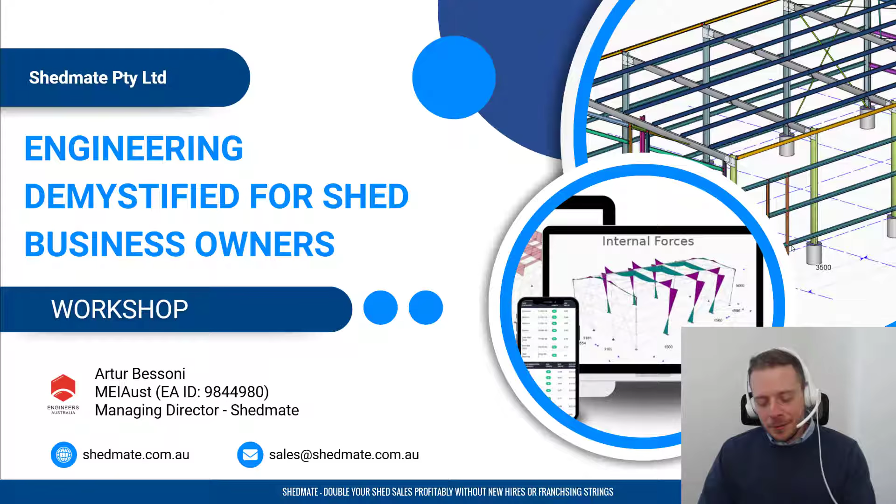And I was looking forward to this workshop. We're going to talk today about engineering demystified for shed business owners. We're going to discover why engineers and shed business owners sometimes hate each other and what's going on, why there's so much frustration with communication with engineers, they never get back and all of that. Why is that? So I want to explain some concepts to you in the face of that communication between these two parties. So if you run a shed business, you probably faced this before.

So why do engineers make everything so complicated? Why do their reports always look different? I just sent a report to them and it came different. Now I have these massive footings. What's going on? And why does it feel like they're slowing me down instead of helping me move faster? I've been talking to many shed businesses around Australia, and there is something that repeats all the time: delays in terms of engineering, inconsistent assumptions, extra costs, liability fears.

What's going on there? So, if you haven't been to other workshops, allow me to introduce myself very quickly. I am both a professional engineer and I own the shed business myself that was supplying cold formed steel. So I lived on both sides of this table, right? Having these discussions with other engineers who were signing on the projects that my business were in, and I've also been involved in structural design, in which we're developing structural design for other firms.

So my goal in this webinar is to translate to you this engineering world in simple terms that make sense for your shed business. And we're going to cover exactly why those assumptions matter, what are these assumptions, what engineers are really doing, and how you can align with them to save you time, money, and headaches. So if you understand better how the engineers work, how they operate, then you can improve your communication with them so your outcomes can be more aligned to your business needs.

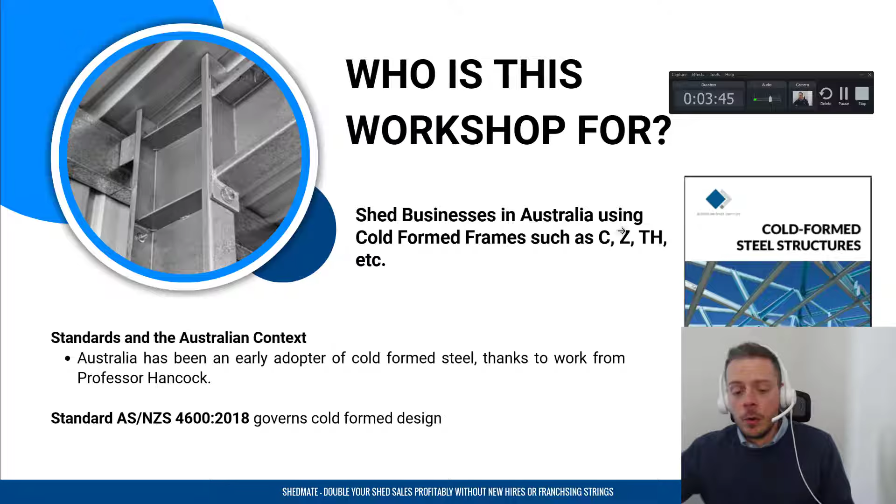So now let's go to assumptions, right? So every time an engineer makes a decision, if it's gonna have knee bracing or not, if it's gonna be pin or fixed connections, if it's gonna be site specific or generic, I'm gonna go through in detail each one of these assumptions and show images so you can understand better. But every time that we change these assumptions, the outcome will be different.

So if we have 5 engineers in a room and you give them the same project to design, they might have different assumptions and you might end up with 5 different projects. So how do you actually get the more competitive one, the one that works better for your company? This is what you're going to see here. So these different assumptions can lead to frustration because the shed owners see this as inconsistency.

It's like, oh, another engineer does this in a more aggressive way, so they think that's better. And the other one is very conservative, so they think that's not ideal. But both engineers can be totally right. And we're going to understand that process better in this workshop.

So by the end of this workshop, I hope you leave here understanding it better, so when you're talking to engineers, you know what to talk to them about, so they provide what you need. Okay. So which option is more conservative? Which one is more aggressive? Let's do a very nice experiment here.

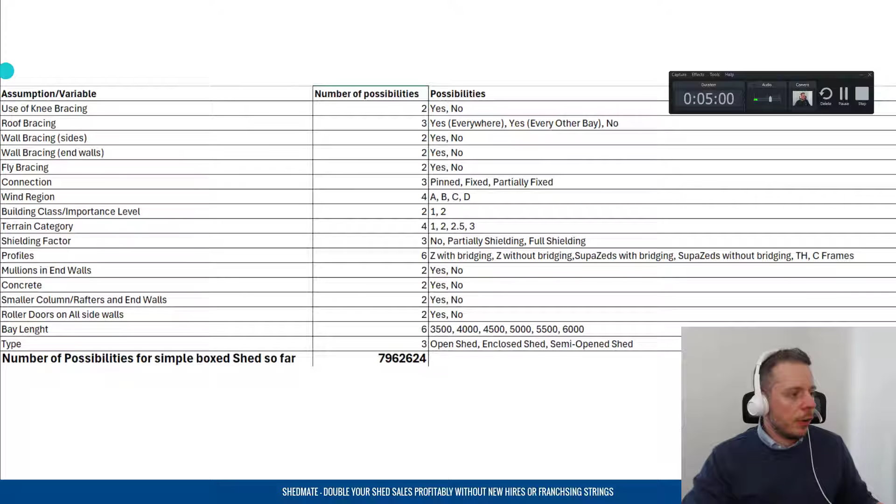So let me just move you to an Excel spreadsheet to show you some of these assumptions or project variables. So imagine you're designing a specific shed, right? It's the same shed, and you send it to engineers, and you say, look, I want you to tell me what's the more conservative frame for this shed. There are lots of assumptions and variables that we can go through.

One example of this is, hey, are we going to use knee bracing or not? Are we going to brace the roof? Do I want to brace the whole roof? Do I want to brace every other bay? Or, hey, I don't want bracing, it's too hard. Do you want to brace the walls on the sides? Do you want to brace the walls on the end? Do you want to use fly bracing? What connections do you use? Is that going to be pinned, fixed, partially fixed? We're going to jump into that later.

What's the wind region? It could be wind region A, B, or C. What's the building class? Is it a garage? It can be importance level 2. Is it like an isolated farm shed? It could be importance level 1, depending on some regulations. What's the TC, the terrain category? Is it going to be 1, so pretty much in front of the ocean? Or is it going to be 4, like in the middle of Adelaide, city center?

What's the shielding? What profiles are we using? Are we using just regular Zs? Are we using SupaZeds? Are we using top hats as purlins and girts? Are we using C-frames? Do you want to use mullions in the end walls? If it's a drive-through shed, then we don't need mullions. Are we doing concreting or not? The concrete can help on the resistance there and create more stable footings for you.

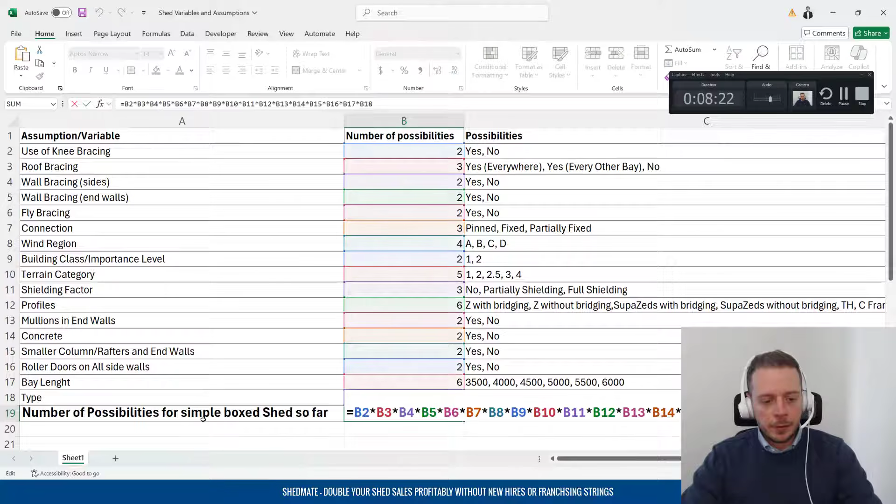And if we start multiplying, for example, hey, I have 2 options, use knee bracing or not. I have 3 options for roof bracing. I have 2 options, 2, 2, 3. So I'm just multiplying all of these here, just so we can see the number of possibilities. This is going to have to be 18. So the number of possibilities for a simple box shed so far would be 29,859,840, if I didn't multiply anything wrong. Yes, that's the amount of different possibilities we could get.

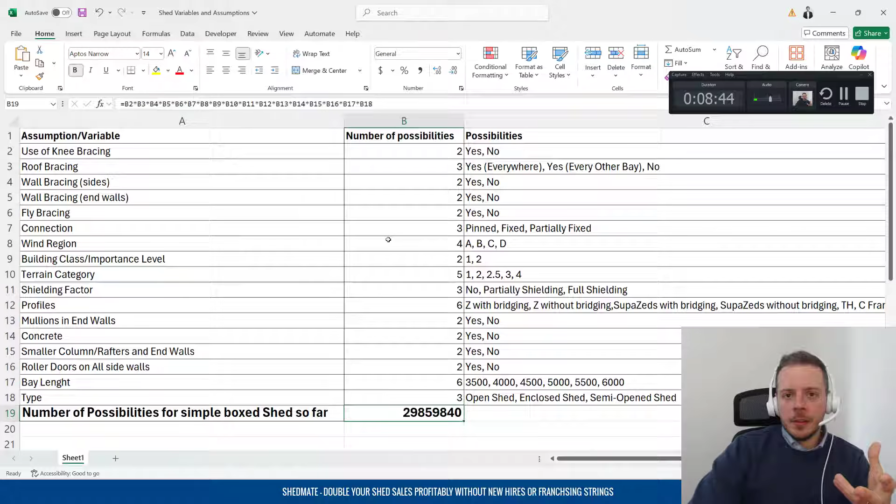But obviously, I'm using very general assumptions here. And depending on your shed business, we can diminish this a lot. So for example, let's say, hey, I'm not going to use knee bracing on my sheds. I want to brace every other bay. I want my sheds to use bracing on the first and last bays. I don't want to use wall bracing. Let's use fly bracing. My connections are going to be pinned, so let's say bracket connections.

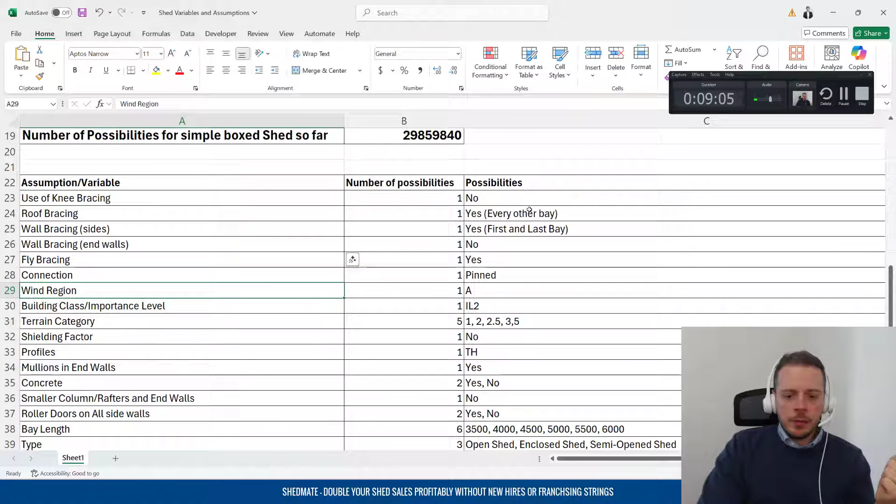It's going to calculate this for region A, importance level 2. Terrain category, that's going to depend, so I'll leave that for the specific site to provide me with the information. No shielding factor, profiles, please do with top hats, mullions in end walls, let's do it. Concrete, well, it depends on the project. Some might have, some might not.

So you can see that I'm starting to reduce the amount of variability, but still I have 360 possibilities for the same shed. And I'm not talking about changing sizes, height, width, length. I'm just talking about some specific variables and assumptions, decisions we could make when designing that shed. So can you see the amount of assumptions here.

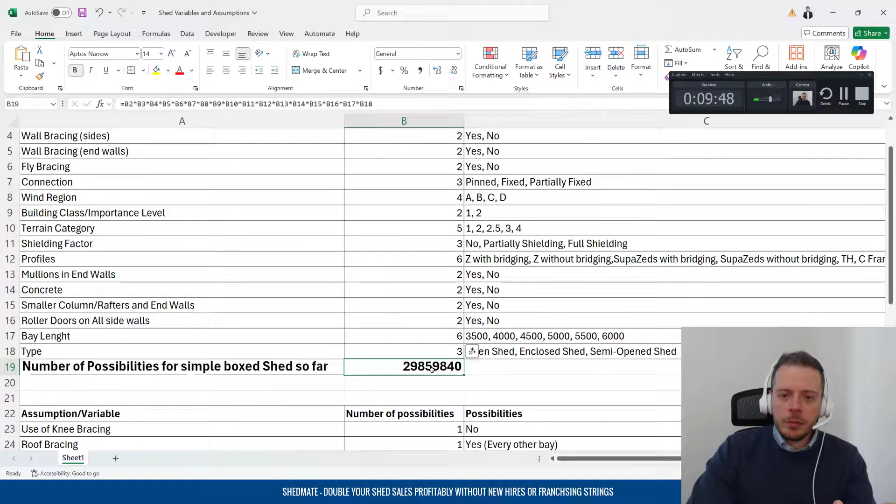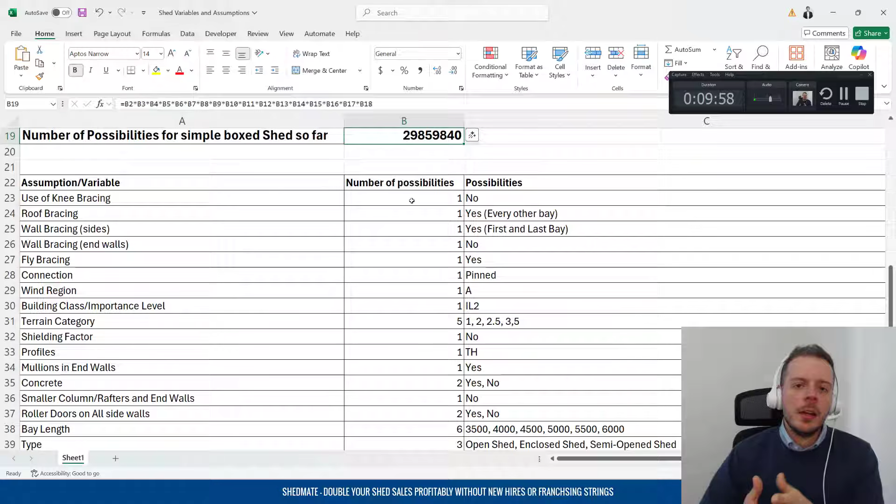So this is why sometimes an engineer will design something and they would add an assumption that doesn't necessarily match your business needs. So you need to be very specific with them about what you need. If you are an existing shed business and you are using a specific software out there, they will have some of those assumptions baked in. The advantage is it simplifies, so you get the outcome without a lot of back and forth. But the disadvantage is that everyone using that has pretty much the same outcome, so you don't have much variability.

So when you have a more custom shed or custom company that's doing welded connections, for example, then you need different solutions. And I guess this is where ShedMate helps a lot, because no matter what your assumptions and variables are, we could work with your assumptions for your business. So you have customers using top hats, customers using Z, customers using fixed connections, customers using pin connections, and the engineering design will change from company to company, which matches their specific needs.

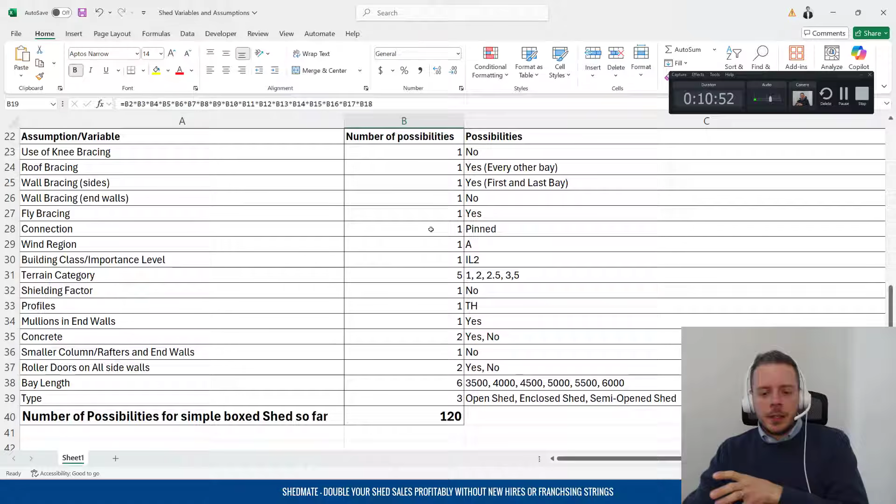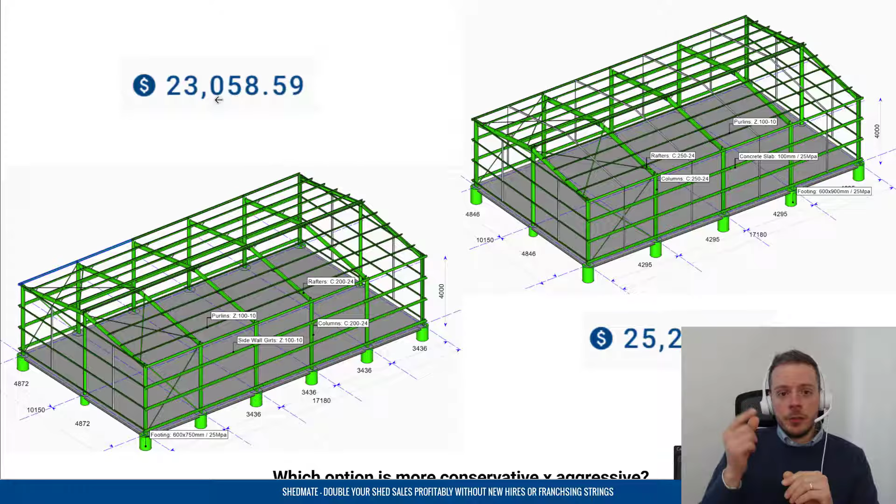Okay, so going back to our slides here, I have a very good example to show you. So this is exactly the same shed, but we're using different portals. This one here uses 5 portals, while the other one uses 4 portals. The one using 4 portals has a total price of $25,200, while the other one using 5 portals, using a C200-24, has a total price of $23,000. So we just changed one of those assumptions. Instead of using a 3.5 maximum portal length, we used a 4.5 maximum, which was in fact 4.3 meters long, more or less. And that's pretty much $2,200 of difference. It's exactly the same shed.

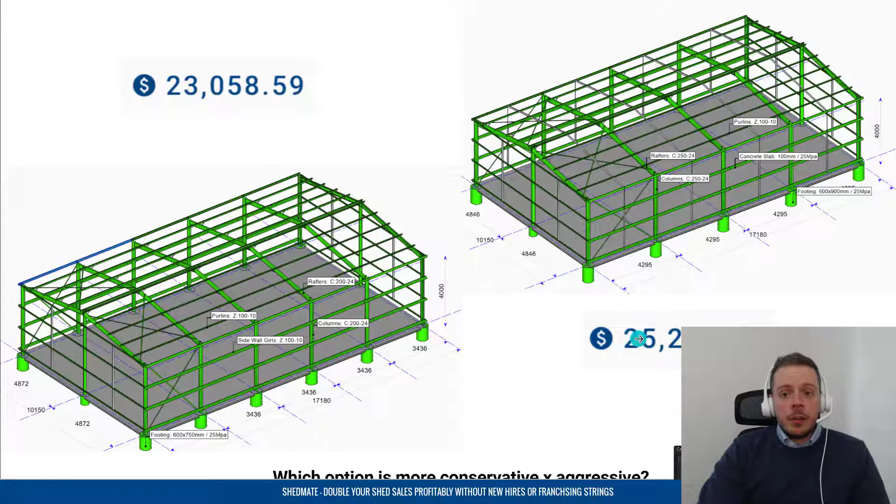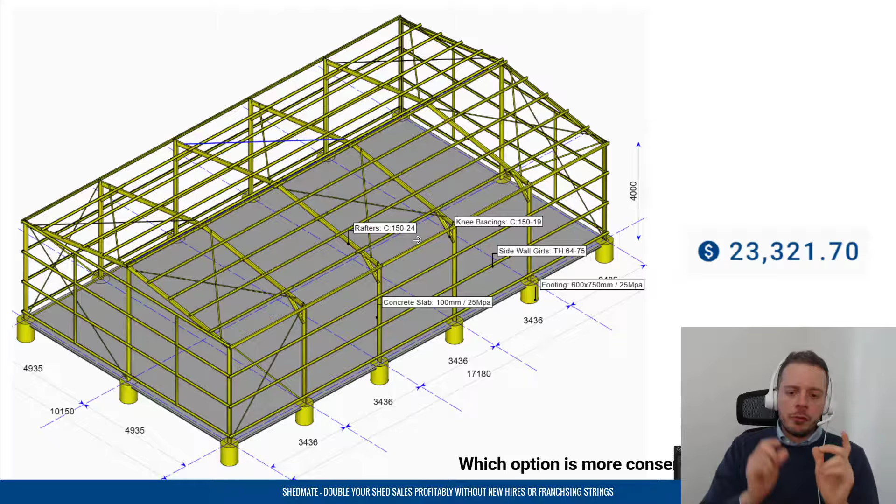So let's look at another option here. This one is using a C150-24 and 5 portals as well, and the price is $23,300. So if you compare, this one is using a C200-24, the other one is using a C150-24. So if you're just looking at those frames, you might have the wrong representation of the engineering outcome. You might say, oh, this one would be the best one because it has a C150 instead of a C200-24. But there are other items you need to consider when pricing.

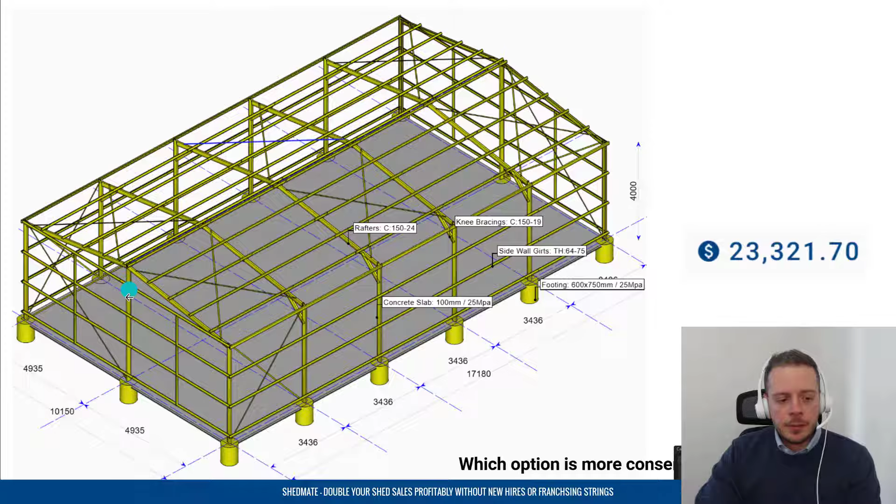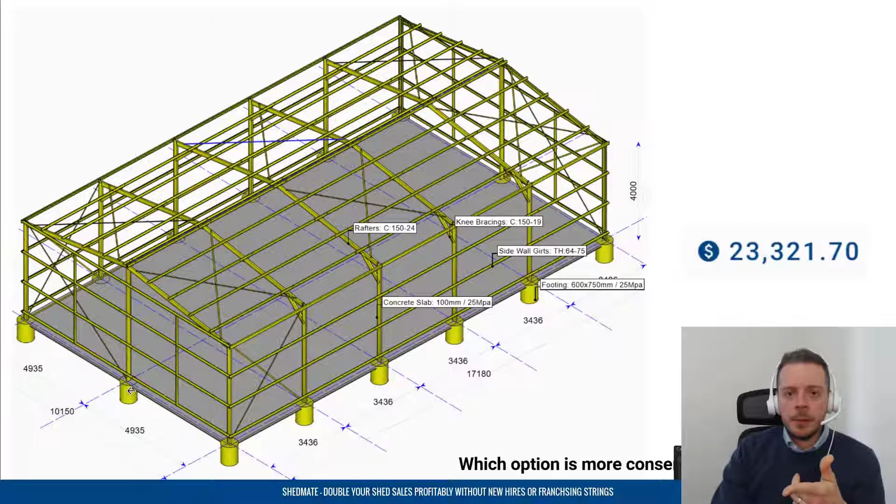So in this example here, we have some knee bracing. Because we have additional bracing on these walls, we need to increase the mullion sizing and probably the mullion footing, which is going to make a difference as well. So can you see that we have 3 different assumptions here, 3 different shed prices. The only way I could find that pricing is because ShedMate allows me to play with the numbers, and I can see how much the change I'm making is going to impact my shed. So this is a very good way to find very optimized solutions that match your business needs, not like a general system that gives you a fixed outcome.

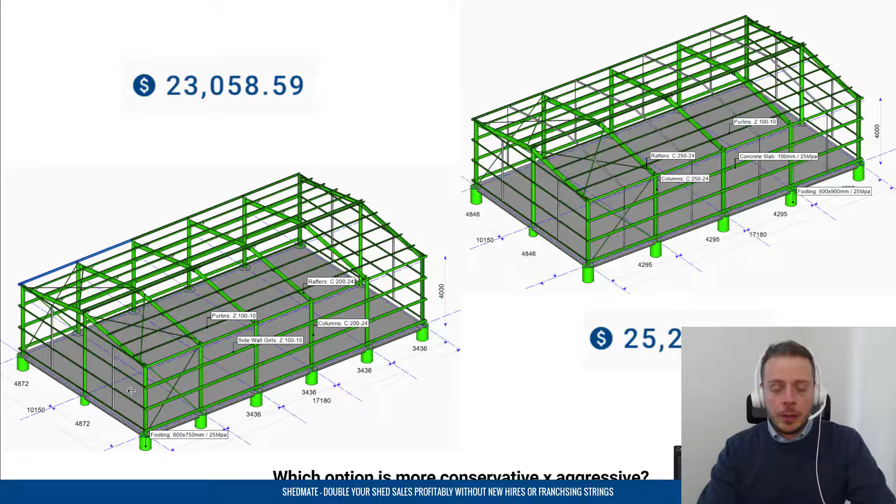All right. Now let's cover some principles that can give us some base so we can cover those assumptions in more detail. And one of them is about cold formed steel and buckling. Unlike hot rolled steel, I'm talking here about universal beams, universal columns, the structural steel or fabricated steel, as different people call it, cold formed is what we call thin walled.

So as you know, cold formed is very thin, so the failure isn't just about stress, but about geometry. I don't want to overcomplicate here, but just follow this with me, and I think it's going to make sense. So buckling is one of the things we need to assess when doing cold formed steel. And what's buckling? It's a deformation of a structural component, such as a column or plate, under a compressive force.

So here's a ruler I have, and it's very thin, as you can see. So if I apply a compression force, what's going to happen is this ruler is going to bend. Right? Can you see it's bending? So this is exactly the same thing that happens when we're doing the design of cold formed. It's very thin, so it bends. It doesn't need a lot of stress to bend.

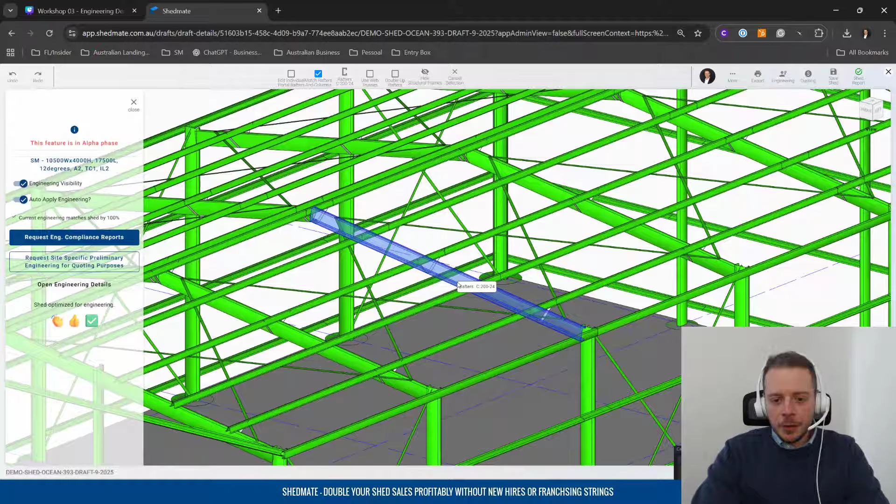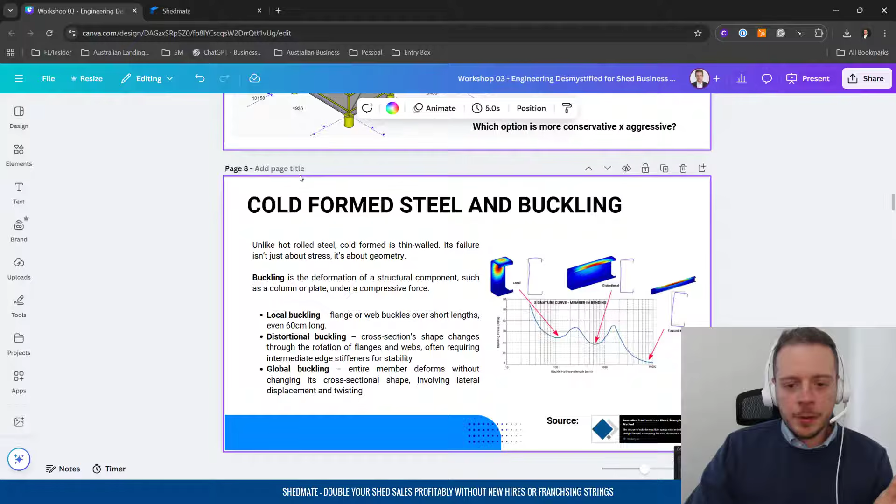So for example, local buckling could happen every 60 centimeters. So no matter the amount of fly bracing I put here, we could still have a local buckling because it's every 60 centimeters. And we don't want to do bracing every 600 millimeters. That's not practical whatsoever. So this is something that we assess when doing the analysis.

The other one is distortional buckling, which is the cross-section shape changes through the rotation of flanges and webs. And then we also have the global buckling. That's where the entire member deforms without changing its cross-sectional shape. Once again, I don't want you to be very worried about the complicated terminology here. I just want you to understand that buckling exists. Remember the ruler? Buckling exists, and this is what we assess very consciously when doing the design of these types of buildings.

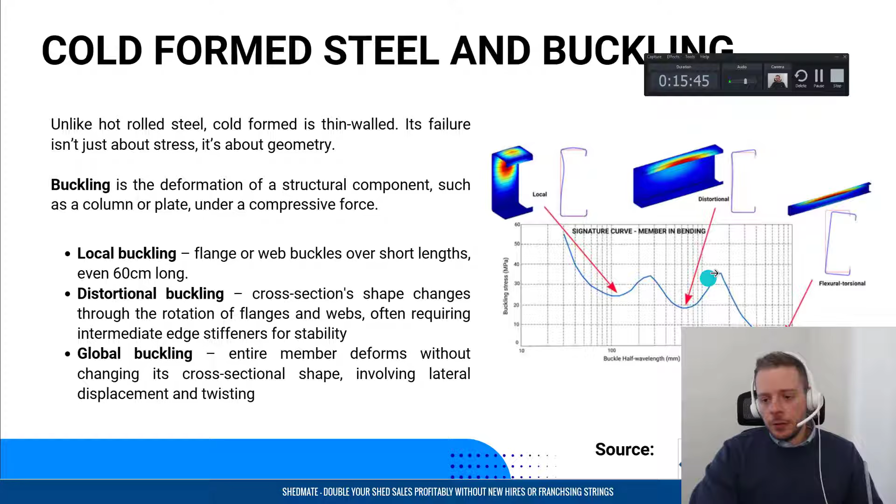This here is what we call the signature curve. That's pretty much the buckling stress and the buckle half wavelength. This is very popular in the more scientific world of structural design. Let's move forward because that gave us that base. So, okay, Arthur, you're talking about all of that BS of buckling. What does that mean for me?

It means that this is why you need bracing. I've talked to some shed businesses who don't like bracing at all. I know it can be a pain to erect, but if you don't have bracing, you need thicker materials. Remember, you need a thicker ruler so it doesn't do this, right? So this is the price you're paying. If you need a light design, you need bracing, right?

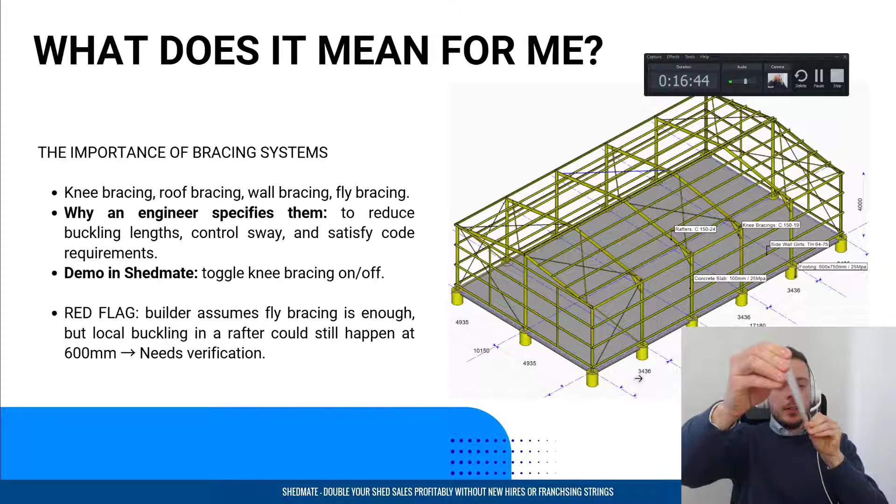So you need knee bracing, you need roof bracing, you need wall bracing, you need fly bracing, because the fly bracing, knee bracing, all of that is going to act as an item that's going to reduce the total length of that specific ruler. So now I need to put a lot more strength to actually bend it. If I have the item there, just like a rafter, look, this could bend very easily. But when I add a fly bracing here, then it becomes harder to do it. So this is pretty much the principle around it, right?

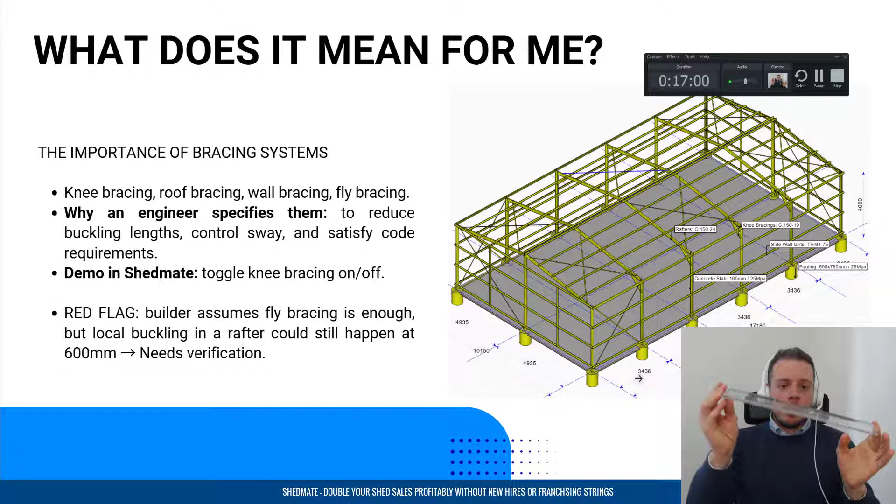So an engineer will specify the bracing to reduce the buckling lengths, as we just discussed here on the ruler. So the length won't be the whole ruler, it will be pretty much from here to here. So now it's a lot harder to buckle, to bend it. We're going to do this to control sway and to satisfy code requirements.

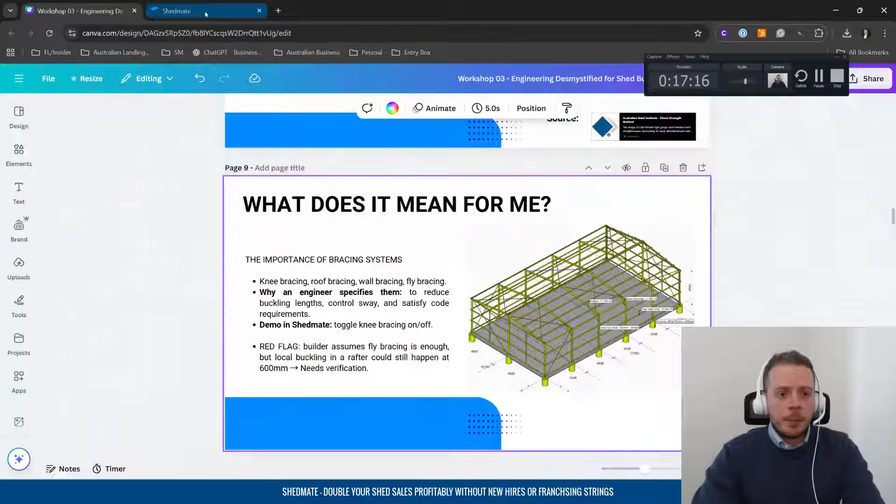So in ShedMate, if you're using ShedMate as a designer, there are many ways to do this. It's very simple. When you come to the system, you go to structure, and then you can add fly bracings, apex bracing, knee bracing, or all of them. And there are lots of rules you could use for how you want it to be. Like, do you skip the first purlin set? What's the maximum spacing you want for them? For the knee bracing, what's the distance from the fascia? What's the angle? Is there any offset?

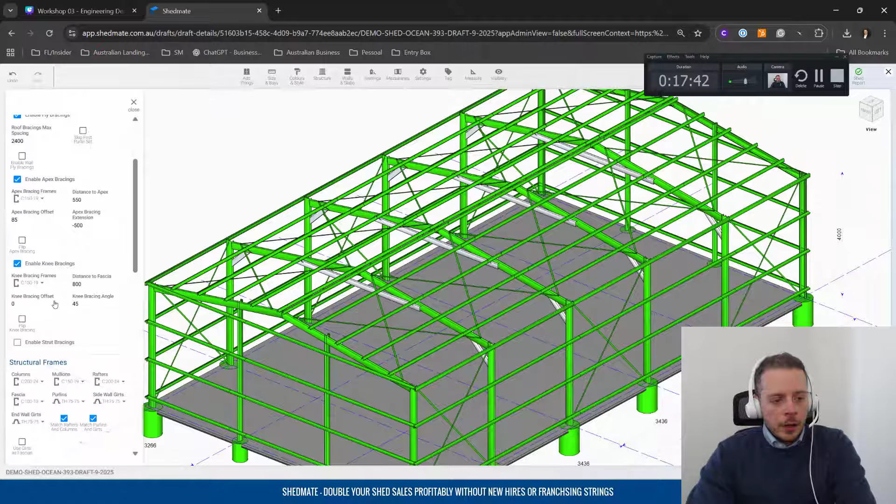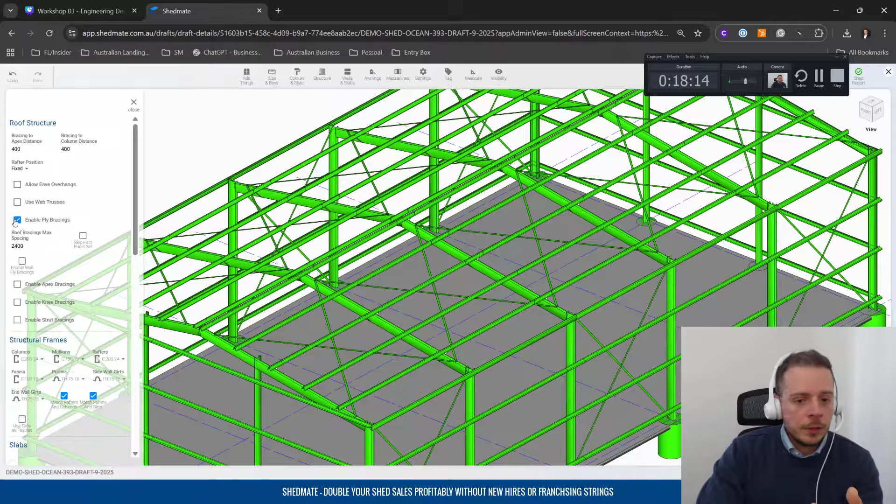So as you can see here, I'm making some changes, and ShedMate is reflecting those changes in the system. I could flip it around. So there are lots of different configurations, and it's very easy to do because you're not modeling each of these as you would do in AutoCAD. You're setting the configurations. That's why ShedMate is a configurator. And then ShedMate is going to apply all of that for you, and you can see the impact in real time. Okay, so let me just remove this here, and let's have that shed without any bracing.

Let's go back to our discussion. So we understood the importance of bracing, and something else that can vary a lot is related to the connection.

Just a moment. Thank you so much. Just got some water here to keep going.

So the connections are pretty much the way that we as engineers will specify how, for example, the interface of the column with the footings will happen. So there are lots of different types of supports. I'll just cover these two because they're the more popular ones.

One is what we call the fixed support. So for fixed support, imagine that I have this ruler here, and I am fixing this in a way that if I try to rotate this, it won't go. So when I do this, it creates some stress on my hand, which would be the footing, right? And this force times distance, that's what we call moment. So that would create some moment that creates some stress, some internal forces here on my footings.

And then we have something that we call pinned support. So the pinned support, just imagine a pin. That's what I'm doing. I'm pinning it. So it still allows me to do this kind of movement. It won't create a lot of stress on the footings related to that moment. However, I cannot go up and down because it's pinned. So this is the uplift and down lift that's happening here on my footings.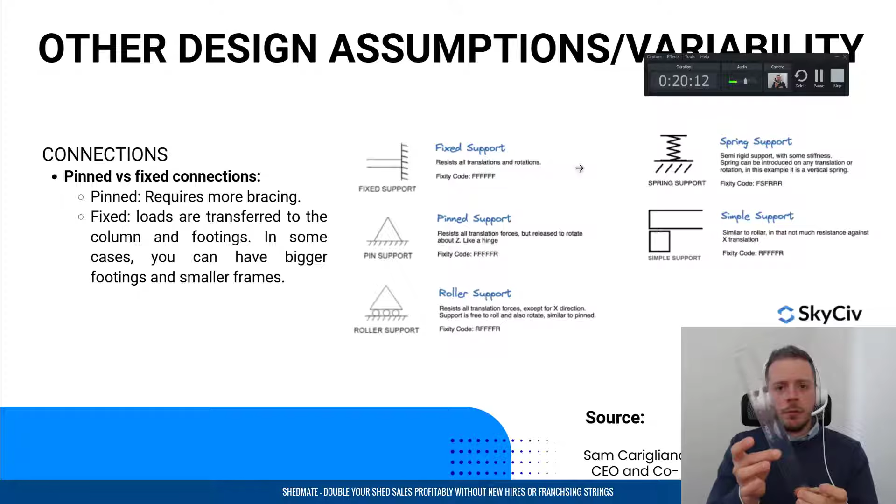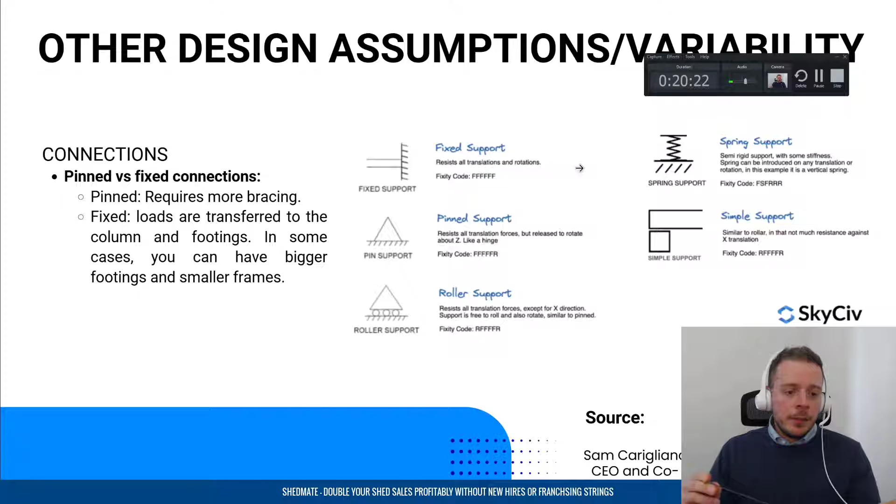So when we define different connections, the assumption will change and the calculations will change as well. So if you're trying to compare a fixed connection with a pinned connection and you want the frames to match, well, you're trying to compare apples with bananas. So you need to understand that these will create different outcomes. Okay, so it's all about your company settings. Once again, this is why a shed is not only a shed.

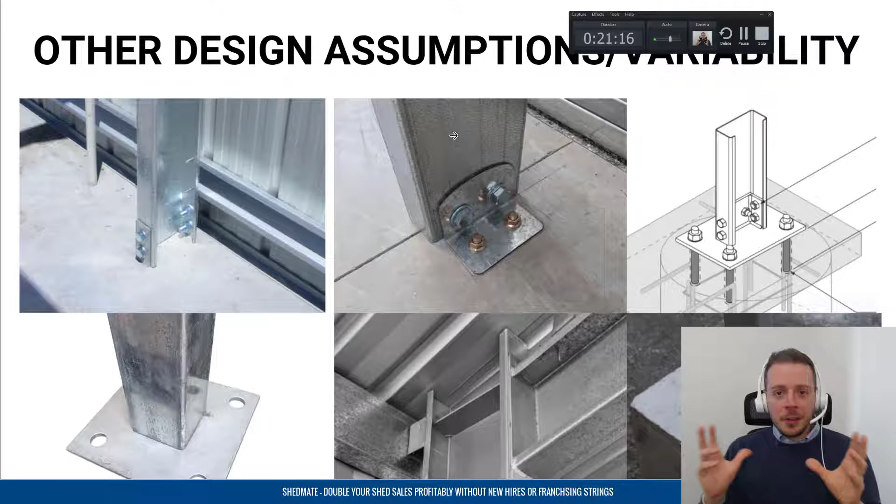There are lots involved in the shed design, but we do have companies using ShedMate for engineering that use fixed connections, they use welded connections, and we have companies using pin connections. And the engineering for them will be different, right? It can be very close in terms of the pricing and design, but it will be different because the structural analysis will be different for those. So that's another example of assumptions that will vary.

Another assumption, this is very, very important, is site-specific and generic computations. So many reports use a generic library of computations. They were built before 2021. So if your shed business operates with an Excel spreadsheet that has some calculations, and especially if that was done before 2021, I'm sorry to say that, but you might be not following the code, right? Because the wind load design was updated in 2021. And if you're not using site-specific, you can go wrong in your shed design.

This is very common still in companies who use a library of computations, and they've done this once with their engineers, they calculated the shed, and now they use that for every shed they're selling. The problem is, look, private certifiers are being more and more picky with that. So you might have troubles, and you might be making mistakes that we're going to see here in an example of 2 sheds using site-specific against generic computations.

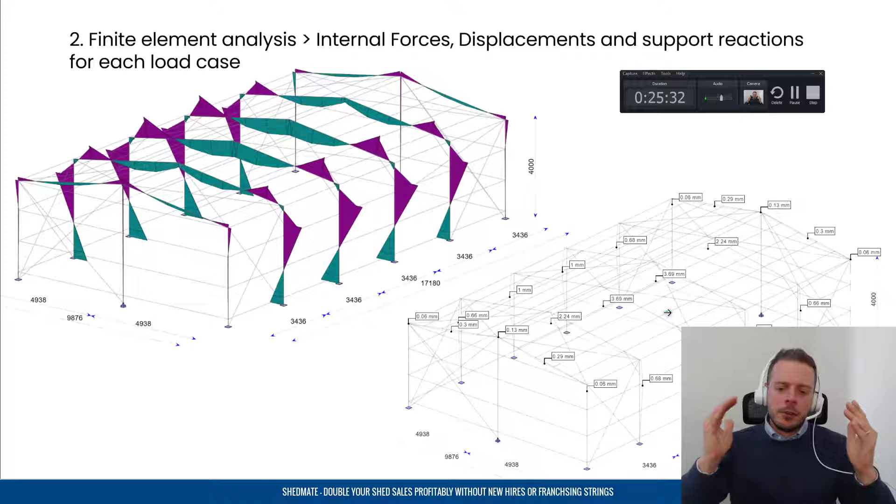One, we could check against ULS, which means ultimate limit state. So think of it as a safety check. It makes sure that your shed won't collapse under extreme conditions like strong winds, heavy snow, or maximum loads. So this is all about strength and stability, proving the shed can hold up when it's pushed to its limit. This is the first check.

Another check would be the SLS. This is the serviceability limit state. So this is the usability check. So my shed will still be there. It won't collapse, but I don't want it to buckle too much. Remember? So even if the shed won't collapse, you don't want it to bend, deflect, or crack too much under normal usage. SLS ensures the shed looks right, works properly, and lasts without issues such as sagging roofs, rattling cladding, and doors jamming.

And then, can I have another glass of water, please?

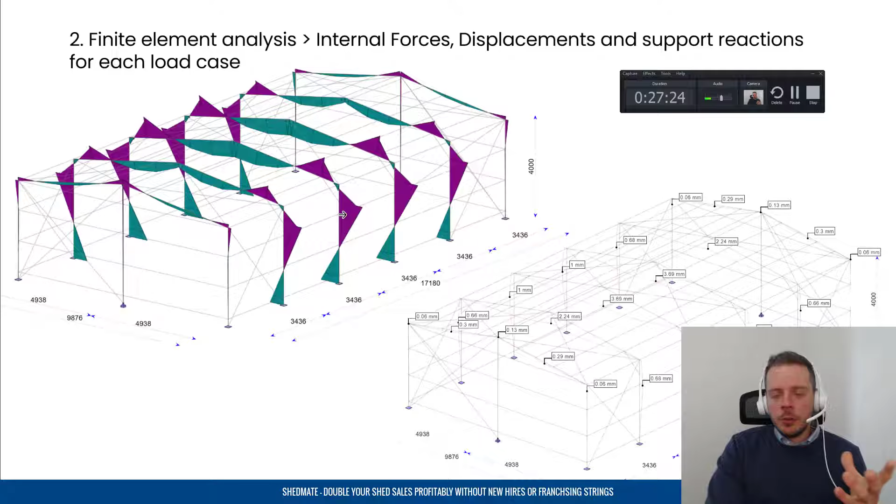And then we have the footing verification. So the footing verification is pretty much the uplift, so we can define how big your footings are going to be. So this is what we do. Coming back here, we define our loads, we define the structure, and then we run the structural analysis. We look at the results for every single item.

So what do you do? Guess what? We start all over again. We change those girts and we do the same thing again and again, and then we get another result. So there's a lot of iterations that happen here until we find the right solution. So understanding this, then you might start to understand that's not as simple when you send a design and say, hey, engineer, tell me what are the frames.

The engineer will send something for you, and then you come and say, hey, you know what? Can I change the columns to something else? The engineers will be like, if it's stronger, yes, make the change. But if it's not stronger, yeah, you could, but I would need to redo this. I would need to go back to my program. I would need to put those items again, and I need to assess these, and I need to make sure that displacement, everything is correct.

So are there ways to do this? Yes, but it's generally a time-consuming process. And because sheds are not an engineering project that's very expensive for the charges of the engineers, generally speaking, they become the bottom of the list. They're not the top priorities. The structural engineer might be working with a bridge, with a skyscraper, with an industrial project, and then when it comes to this little shed with all of this back and forth, it's just like, oh, that's a pain.

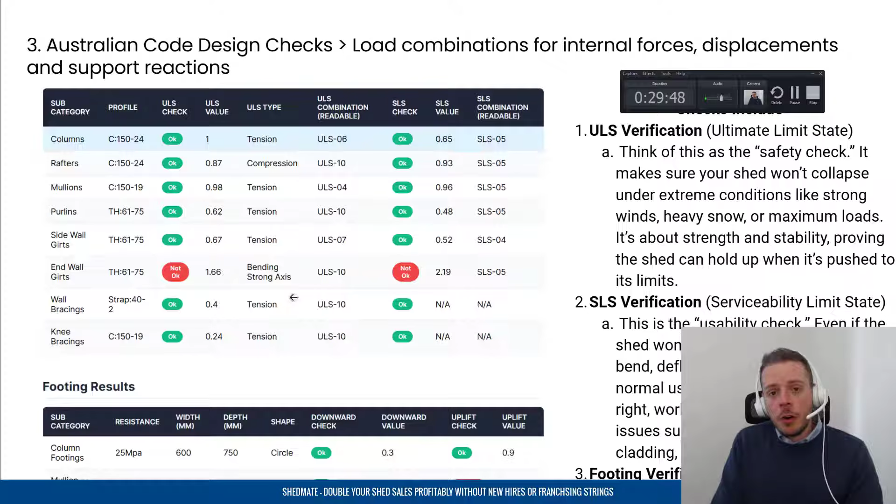You could have your Excel spreadsheet. Some engineers do that, and they can change a few numbers, and they can have a good understanding about what's the outcome for that specific shed design. But if they want to do everything right, they need to follow a process, and this process is not straightforward. So it requires time, right?

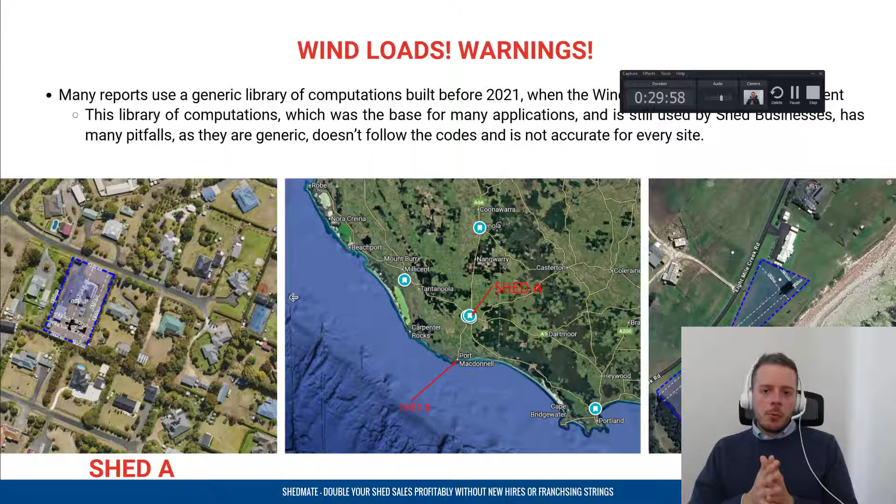So understanding all of these, talking about here the different assumptions, I would like to cover now an example for wind loads. And this is a big warning. And I'll restate what I said before. Many reports will use a generic library of computations. They were built before 2021.

And this will say, hey, if the shed is, let's say, 10 meters wide, 4 meters high, and 15 meters long, in region A, that will, let's say, accommodate South Australia and Victoria, then you can use these specific frames for that shed. However, that can be wrong, and that's what I want to show here.

So I'm here. I'm doing a comparison with two sheds. They're both region A, exactly the same shed. One is in Mount Gambier, so it's in the middle of the town. The other one is in Port MacDonnell here. So the Port MacDonnell one is kind of in front of the ocean, as you can see. This one here is enclosed in the town.

So when we actually do the site-specific analysis, shed A in Mount Gambier gives us a design wind speed of 37.35 meters per second. This is gonna include the analysis of the terrain category, importance level, shielding, all of that. The other one, shed B, gave us a design wind speed of 40 meters per second.

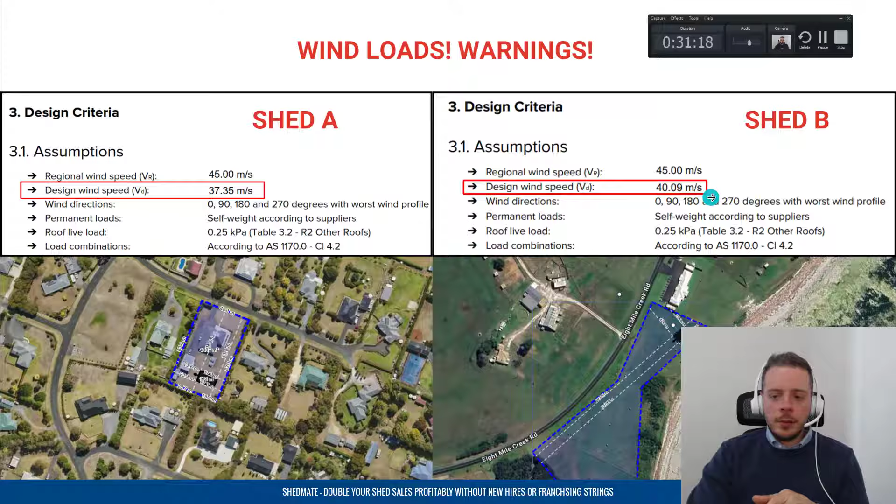So the outcome for those sheds is, if I was using that generic library of comps, it worked on the left side, but on the right side, on shed B, it didn't work. I need better wall girts. It's not passing, and I need better footings and mullion footings. Obviously, I'm not considering here the soil reports. That's just a quick analogy, a quick experiment, so we can compare these two sheds.

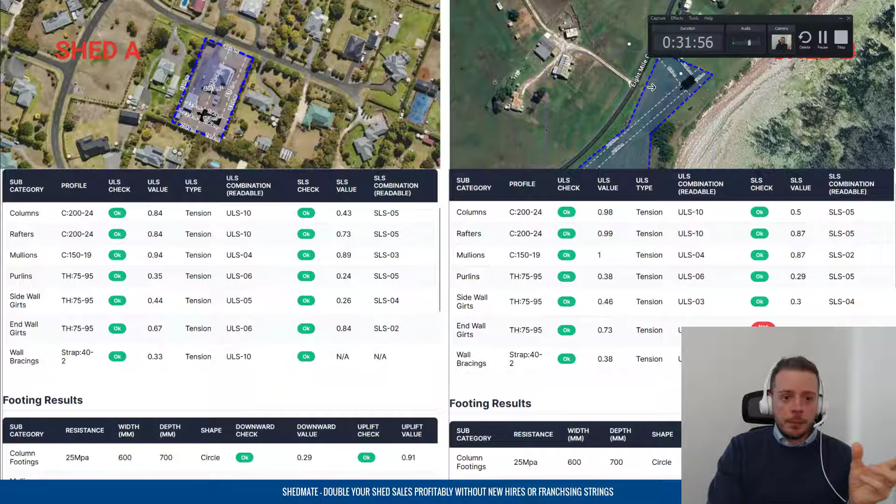So I just want to bring that up so you can see that if you're using those Excel spreadsheets that don't consider the site-specific wind, you might be doing something wrong depending on where that shed's being placed, and depending on the orientation, depending on many different factors.

Here's another example where I've done a very similar study. This now is in New South Wales, and shed A is in the middle of lots of trees there. It's kind of a farm area, and shed B is in front of the ocean again. Obviously, I guess I'm exaggerating a little bit on this demonstration here, but you could build a shed there, right? And as you can see, this example here doesn't pass for the columns, for the rafters, and the column footings.

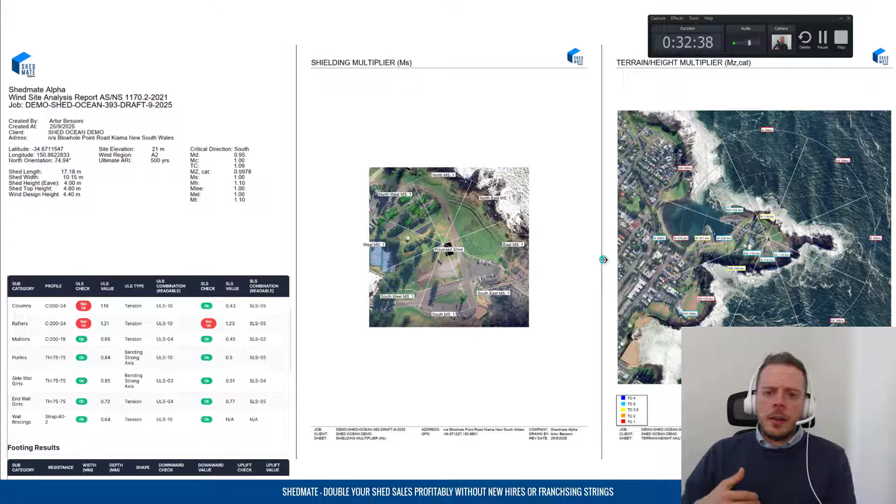So if you're using a library of comps and it's exactly the same, you're not using site-specific, that assessment could be wrong, because the wind in this case here is, if I'm not mistaken, 47 meters per second. So this is what needs to be assessed. So the wind loads can be a problem if you're not using site-specific. That's why it's very important, especially after 2021 with the updates, to review those calculations you have, or use a system that can give you site-specific engineering reports.

Okay? So what does change from project to project? When you're calculating the Vdes, like V velocity or speed for the wind, there are a few different factors that will influence that calculation. One of them is the wind region, if it's A, B, C, or D. The other one is the importance level: if it's a domestic garage or a critical farm storage, it's importance level 1 or 2. The terrain category, if it's open farmland or suburban streets; the topographic factor, if it's on a hill or flat ground; the shielding factor, if there are trees or buildings nearby;

and the site wind speed, that's the final calculated value. So we can have exactly the same shed, but we can have different assumptions, not only in terms of the structure, but also in terms of the location, where it's going to be. And this is going to create different designs. So it's very common for shed businesses to believe that once a shed is engineered, they can use that as a base to design it in other locations. But we have just proven to you here, and we have shown a workflow, that that's not necessarily the case. You can encounter issues if you're using the same engineering.

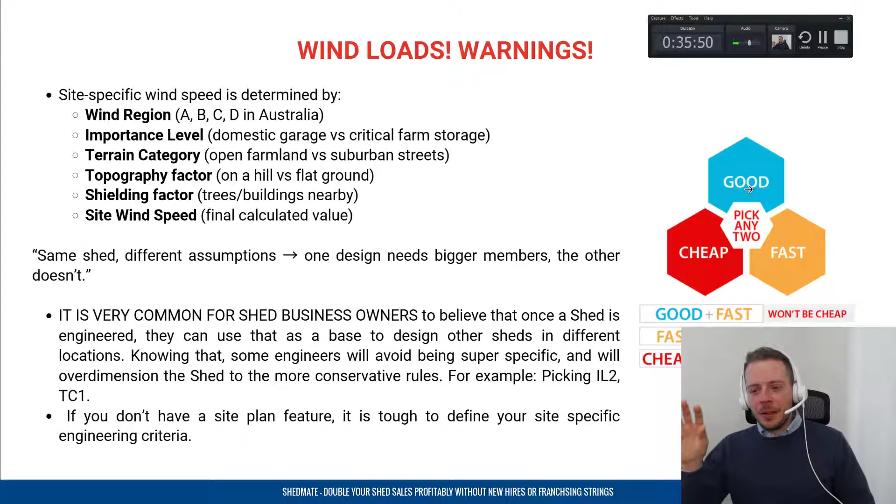If you want something that's cheap and good, it won't be fast. Okay. But if you want something that's good and fast, it won't be cheap. So you've got to pick two and understand that it's very hard to have all of them. We're doing our best here on ShedMate to deliver the three, something that's good, fast and cheap, but this triangle still applies.

So just to summarize and getting to the end of it, a discussion about real world pitfalls and misalignments. I had a very interesting case. We had a customer that, before joining ShedMate, was a franchise supplier. I won't name them specifically, but they were one of those big shed suppliers out there.

And he wanted to compare ShedMate's engineering reports with theirs, to say, okay, I can transition to ShedMate because it's going to be very competitive. And when he first looked at our reports, he said, hey, your report's too conservative. And you were like, what are you talking about? And he said, no, the frames are too strong, blah, blah, blah. And then we asked him, can we actually get the report you're comparing to? Just so we can see what's going on there.

And we saw a few interesting things. One of them is the previous engineer used a generic wind speed, not site specific. This specific shed was in front of the ocean, just like the example I showed you. So the design they're using pretty much wouldn't pass, or at least wasn't being done in an effective way. So that was a reason why our design was a little bit stronger, because it was following the site-specific wind reports.

Sorry guys, my voice is going away.

Two, this was for a specific RHS shed, and the report was giving them a high strength grade of steel, C450, but the builder had no idea about it. So he was just using commercial steel available. I don't know if in his case it was C250 or C350, but they're not using the C450. So by not following that, the liability shifts to the builder, because they're not following the engineering calculations. And that was an oversight. They didn't notice that.

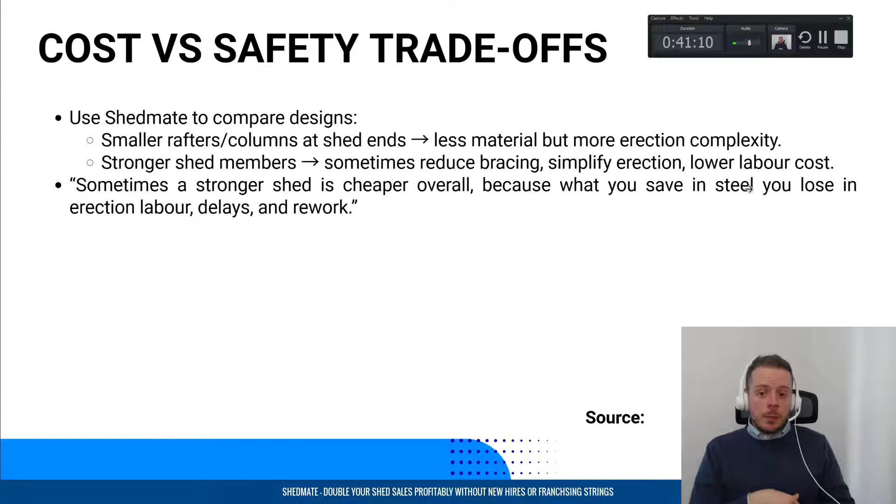Also, stronger shed members, as we have seen in an example today, can reduce the bracing, simplify erection, and produce lower labor costs. So even a stronger shed can be cheaper overall, because what you're saving in steel, you lose in erection, labor, delays, and rework.

Some takeaways. These are some practical advice I would provide in terms of having that discussion between the shed business and the engineers you're using. So the first one is always clarify those assumptions. As we have seen here, don't just send a design to an engineer and say, "Hey, design this for me." As you have more and more experience on the sheds that you're designing, provide more information to the designer. Tell them specifically how you want it and understand the impact of it.

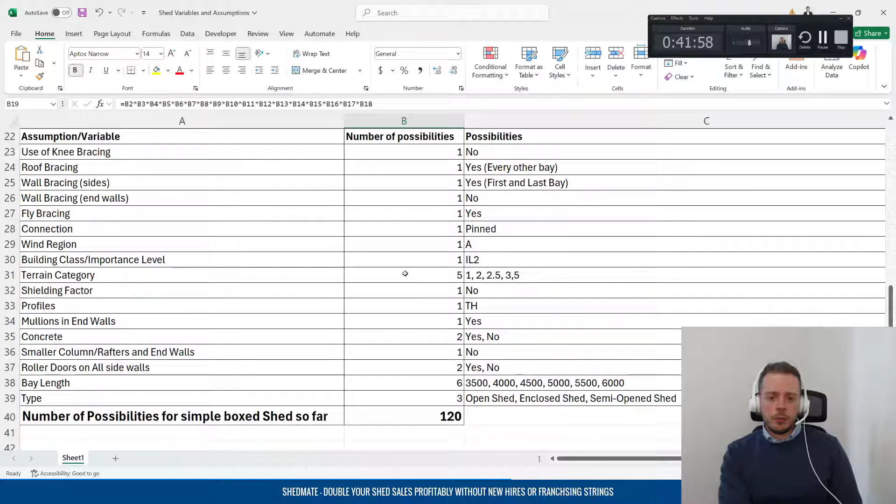As I said, if you're using knee bracing, you might benefit from a few things. If you're using a fixed connection, you might have different results. If you're changing the terrain category, if you're using concreting or not, all of that will vary. And this is why I really like the way that we do this in ShedMate, because when you're in ShedMate, the designer, the engineering, and the pricing, they all work together.

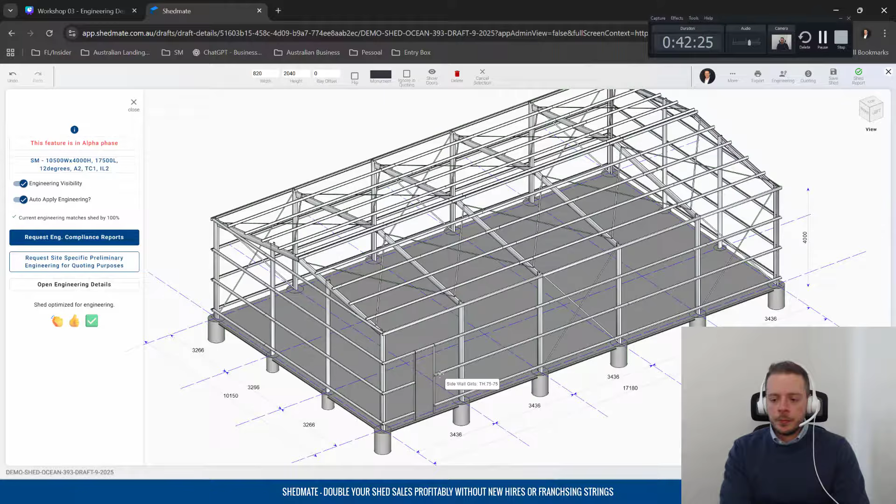So let me update this engineering here for us, for example. Done. And what I mean here is, as I'm adding things, for example, let me add a roller door here or personal access door. Look what happens on my pricing. So this is going to include that. It's going to cut those girts.

And if I start making modifications here, for example, look, I like this design, but I would like my maximum purlin length for this specific shed to be 1.1. So this one made the difference, and ShedMate's already notifying me that, hey, that's pretty much over designed, but that's fine. If you want to do that, then you can see the impact of that on your project. And when you request engineering, this is what's going to come to our engineering department. They're going to see the shed as you design with your preference on it.

So if it's going to be 1.2, look what happens on my pricing. Or in this case, it doesn't change much. Let me go 1 meter. There you go. So that's 25.5. And if I go back to 1.2, this is 2507. So there is a little bit of difference there.

Another example is mullions. For example, just to simplify this, if you're rolling your own materials, you might say, hey, look, for this shed, everything is 224. I don't want to cut another frame. I'll just use ones that I have here in the workshop. So let's do these ones 224. So if I go here and change that to 224, my price will go from $25,000 to $25,200. So we're talking about a $200 difference.

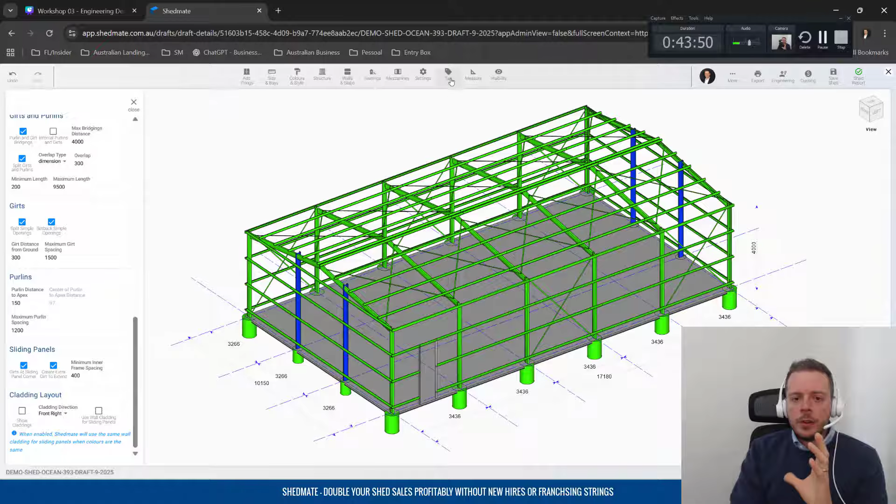So these are ways that you can actually go through the system and explore different design options and how you want the system to work for your business. And then that can pretty much be taken into consideration for your engineering. Another example here would be the maximum bay length. So in this example here, we're using 3.5 maximum, and we have a $25,000 shed.

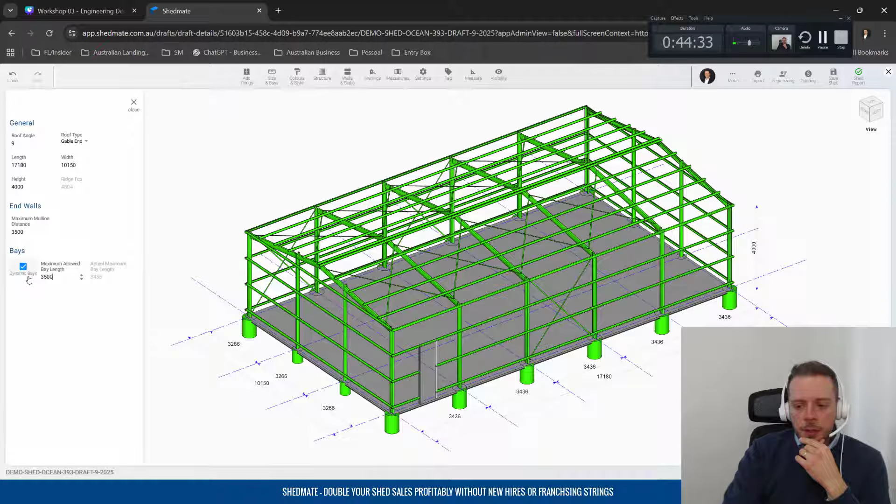If I change this to 4.5, then you can see that this actually found another engineering that needs some attention. It actually needs up to 24. Yeah, that's good. That's not bad. So if I go back to 3 meters long, let me see if I have any engineering for 3 meters long. Yeah, that actually became more expensive. See, so all of these assumptions you can make, and you can play with the system to actually understand what works better for your business.

Okay, coming back to our slides. Demand site-specific wind designs if you can, specifically if you're doing sheds in front of the ocean, uphill, sheds in more aggressive areas, or if you're doing a shed that's very high. So you need to consider all of that. If you have lots of roller doors or sliding panels, it's good to do a site-specific design. So always do that if you can.

And understand that cold-formed design is about geometry, not just stress. So we discussed the importance of having the bracing to reduce that total length. So the bracing will work as a way to reduce the total length of that specific thin-walled element, and then we can have a better outcome.

If you don't want to use bracing, you need to use a thicker material. So these will require stronger frames. So you need to understand that there is no way around this. This is science. Okay, that's natural science in physics. So that's how it is, and we can't change that.

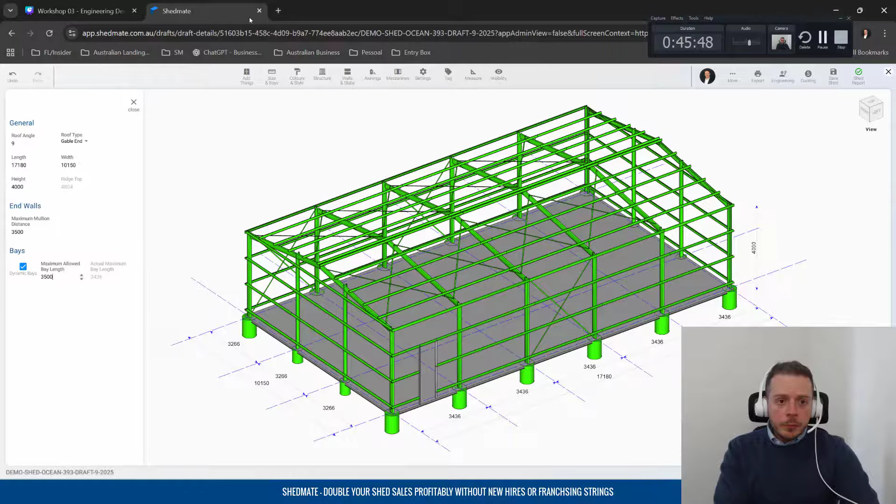Don't rely on insurance as an excuse, and use tools like ShedMate to compare those different options and make smarter decisions when you're designing. And I'm not talking only about the structure, but also when you are talking to the client and advising, you can make modifications here that will impact on the final price.

For example, hey, if I add a roller door here, how much is it going to be? Look, that should be $26,000. And your customer might say, look, I need that roller door, but I only have $25,000. What can you do? All right, let's try to decrease this to 3.8 meters high. All right, maybe 3.7, 3.6, and then we can, there we go, 25.2 thousand. Would that work for you?

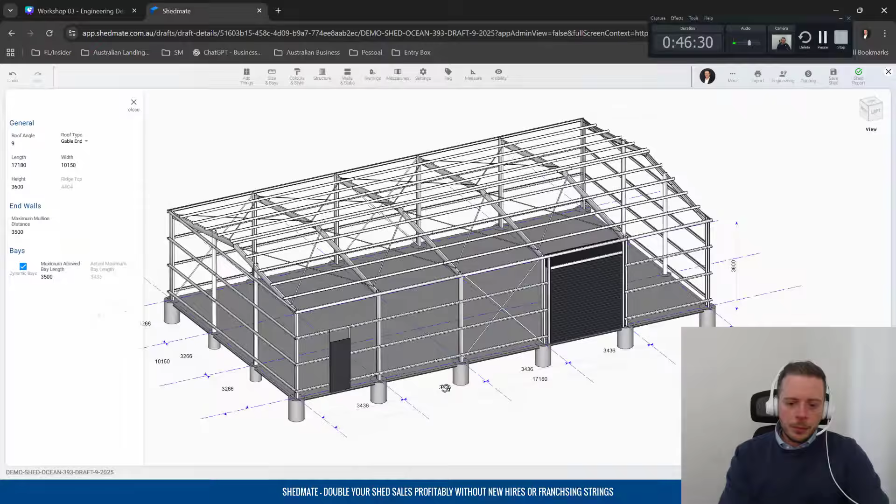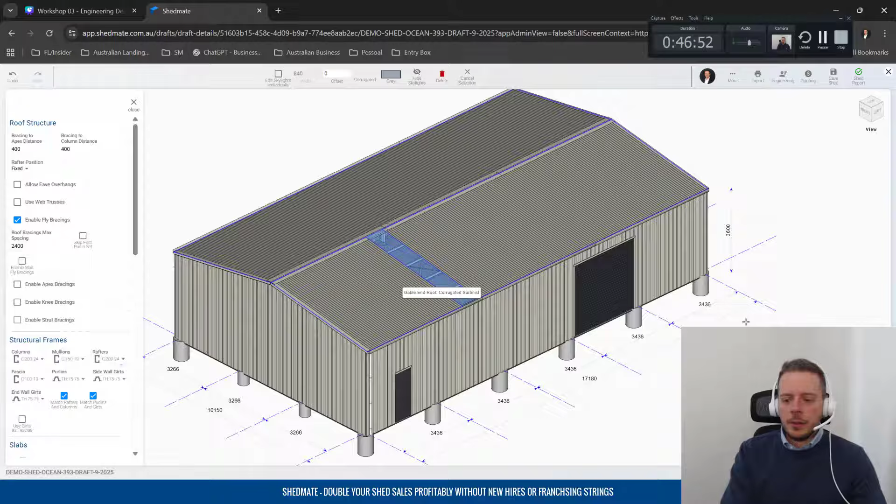That's too much. Okay, we can add some additional bracing here. We can change a little bit there. So you can make these modifications, and as you do that, you can see the real-time pricing impact on your shed. No matter if you're making changes to the structure itself, or changes related to the shed architectural layout, for example, adding sectional doors, glass doors, sliding panels, windows, spinaways, downpipes, skylights, you can see that impact in real time, which is very helpful to make the decisions for you.

And to finalize, engineers aren't trying to be a pain, right? They're working under different rules than you are. Once again, as we discussed in the beginning, they operate to remove risk. And once you understand how the assumptions drive the outcomes, you can align with them to reduce the surprises and run a safer, more profitable shed business. My goal in this workshop wasn't to turn you into an engineer, but to give you the clarity to question, align, and take control of your projects.

Something I always like to do is a quick review of everything we discussed, and I would like your permission to do that. So, a summary here. There is a shared frustration between shed business owners and engineers, but once again, they operate under different assumptions. Engineers focus on the natural and physical sciences, mathematics, analysis, engineering design practice, codes, and liability, while the shed business operates under margins, timelines, and client satisfaction. This was a workshop for cold-formed companies.

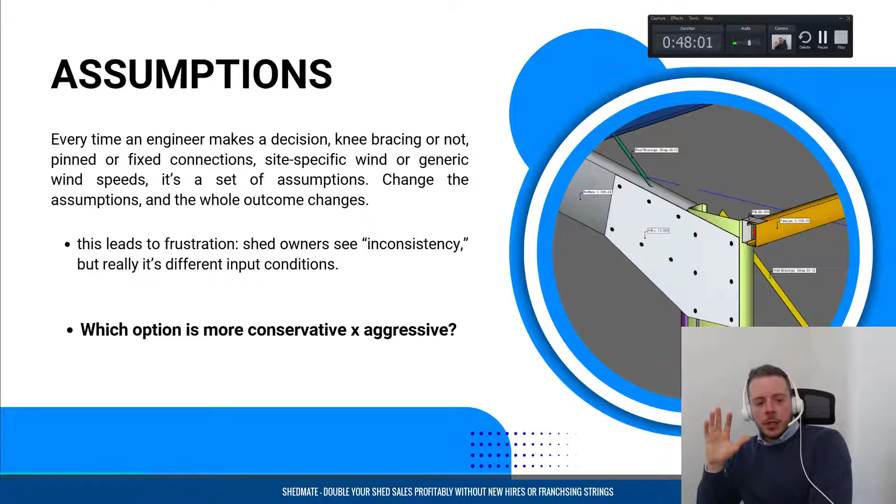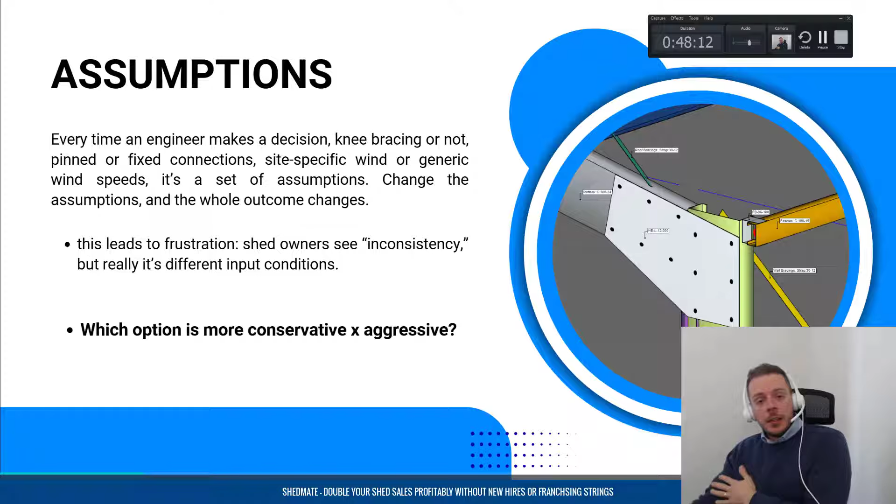We covered that different designs from one engineer to another are not necessarily better or worse. It depends on the assumptions for each business. And as every company is different, there is no way the engineer will know about all of the thousands and thousands of different possibilities out there if you as a shed business owner don't provide some of the assumptions you would like to use in your business.

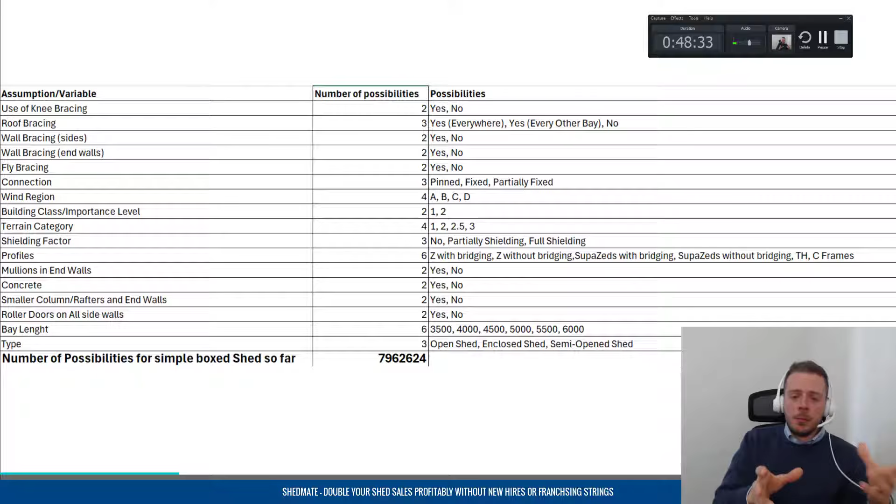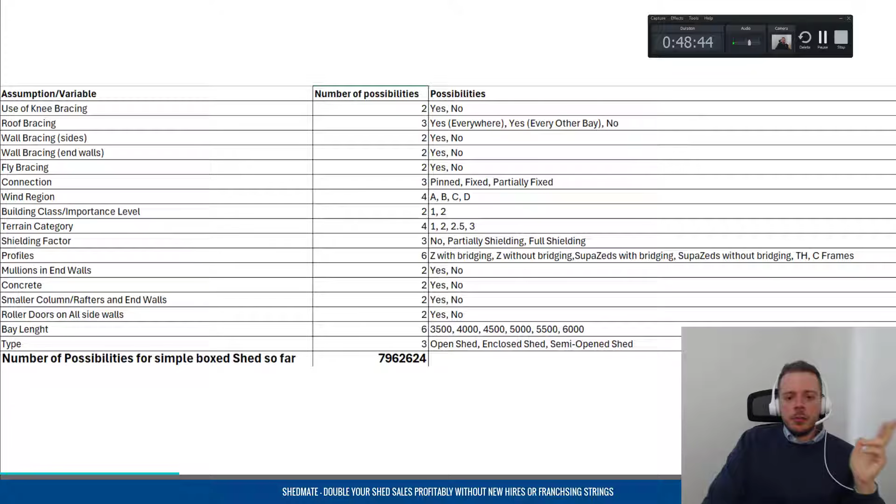We went through an Excel spreadsheet comparing the different possibilities, assumptions and variables that just a small shed can have, and we got millions of options out there. So using knee bracing or not, using roof bracing or not, using fixed or pin connections, what wind region we're using, what shielding factor, what bay lengths we're using, all of those different variables will give us totally different outcomes.

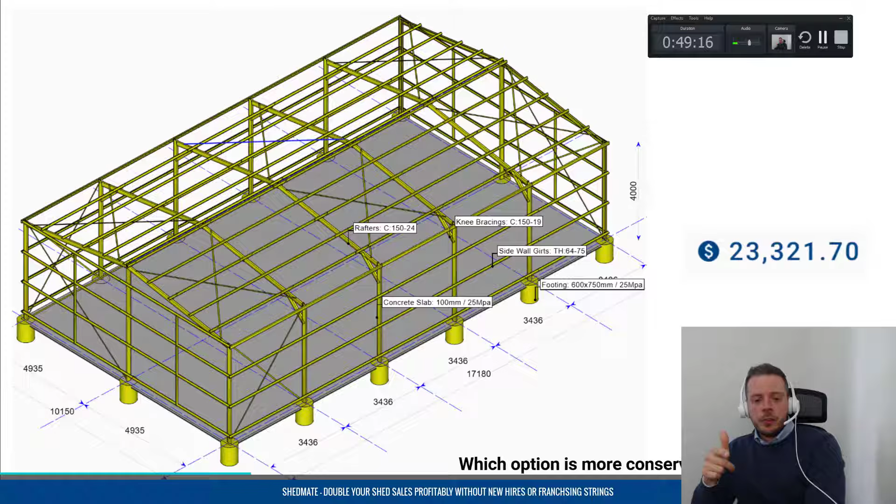We compared different sheds using ShedMate. One using 4 bays, the other one using 5 bays. So same shed, just one portal more, and we could see that the one with one portal more gave us a cheaper outcome, which is great. Another one using 5 portals, but with C15024 and knee bracing, actually became more expensive than the other solution. So there are lots of things we need to consider when assessing sheds, not only the size of the portals; other factors will play into getting you a good outcome.

We discussed that cold-formed steel is all about buckling of thin-walled materials. So it's important that we use good bracing, and we understand that even when we're bracing, some buckling can occur, like local buckling every 60 centimeters or 600 millimeters. So bracing alone is not going to solve everything. That's why engineers need to assess the projects.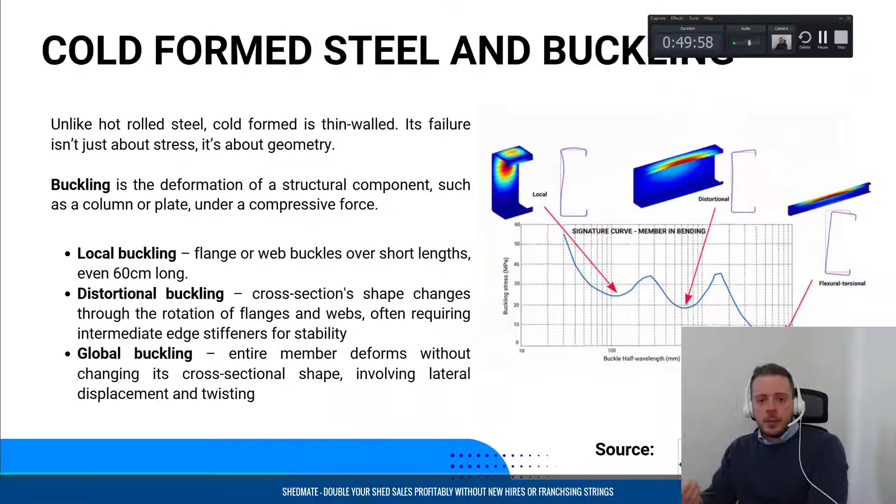And that means for you as a shed business that bracing systems are very important. If you don't like them, you need to get thicker materials. That's why you're probably going to end up with, let's say, 150 24s instead of 150 19s. Okay.

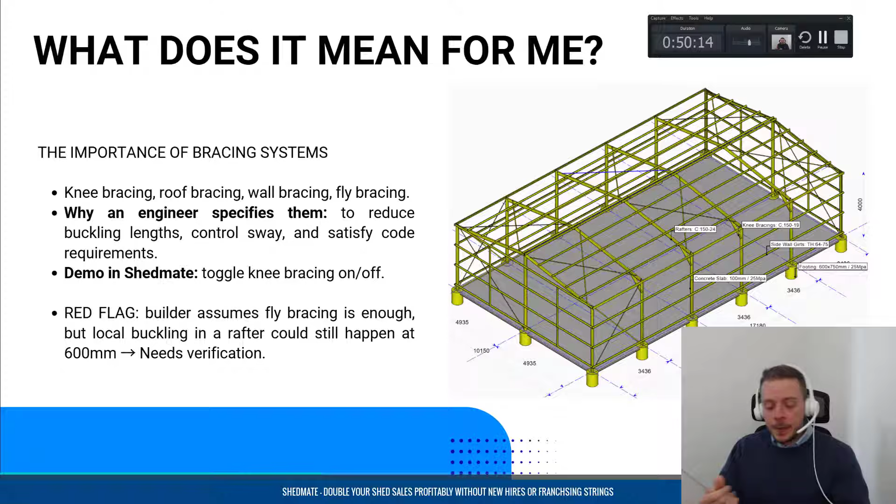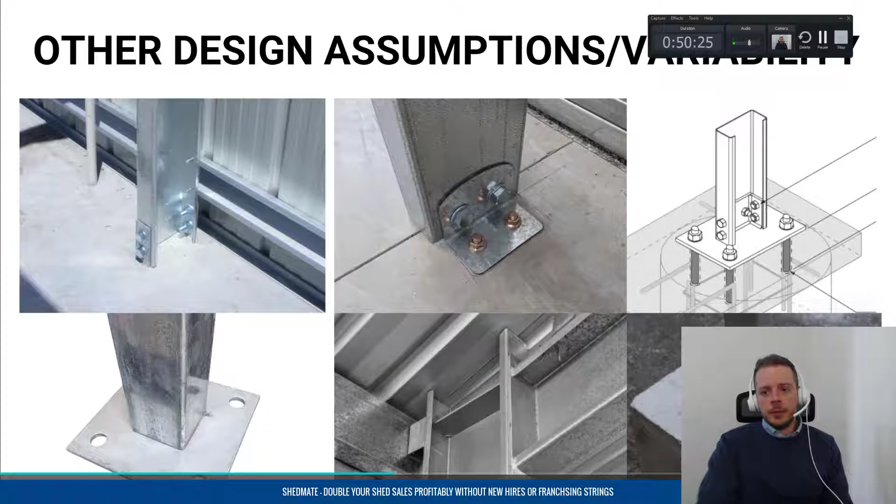We discussed different design assumptions for the connections, if they are fixed or if they are pinned, and how that impacts your footings, how that impacts your overall shed sizing. We also discussed site-specific against generic computations and what are the challenges of using generic computations when we have different wind speeds that can impact your shed design.

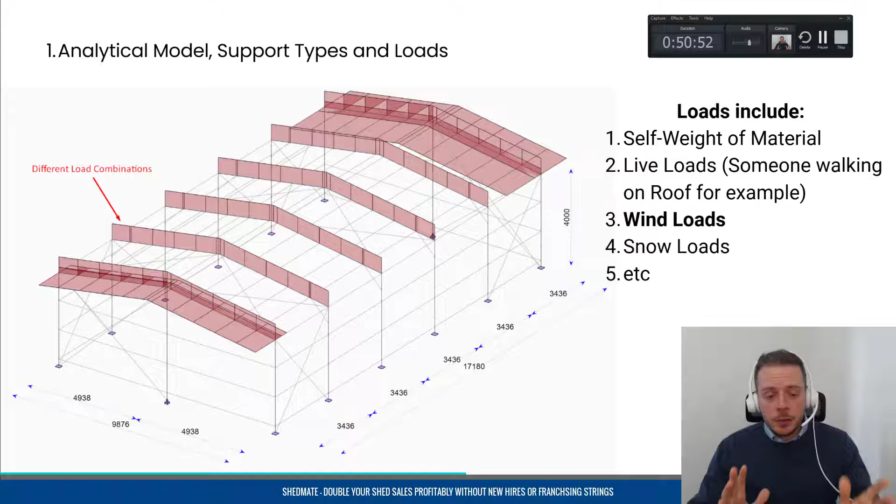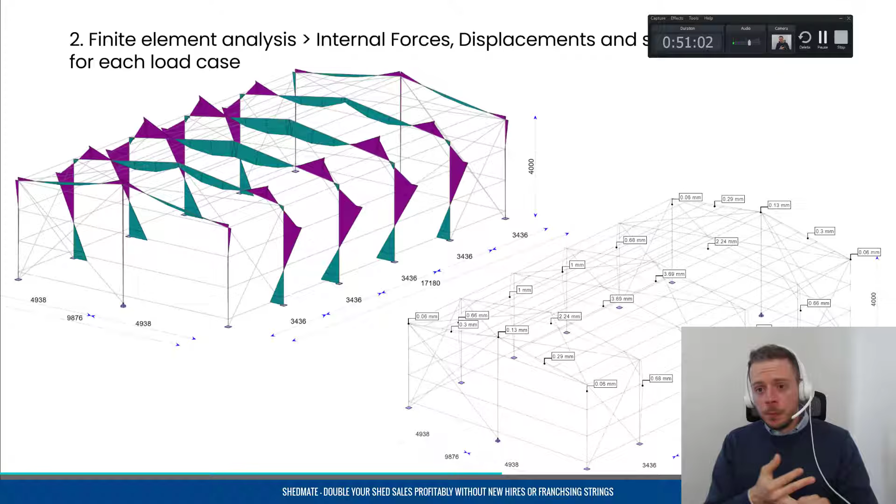We went through a very basic step-by-step process on how we engineers do structural analysis. So we start with the analytical model of the geometry of that shed with support types and loads. Then we can run, for example, finite element analysis tools such as Robot, SpaceGass, you name it, to actually identify those internal forces and displacements. And then for each of those cases, we can assess against the Australian code designs the load combinations, so we can understand if the shed is gonna be safe and it's gonna be usable.

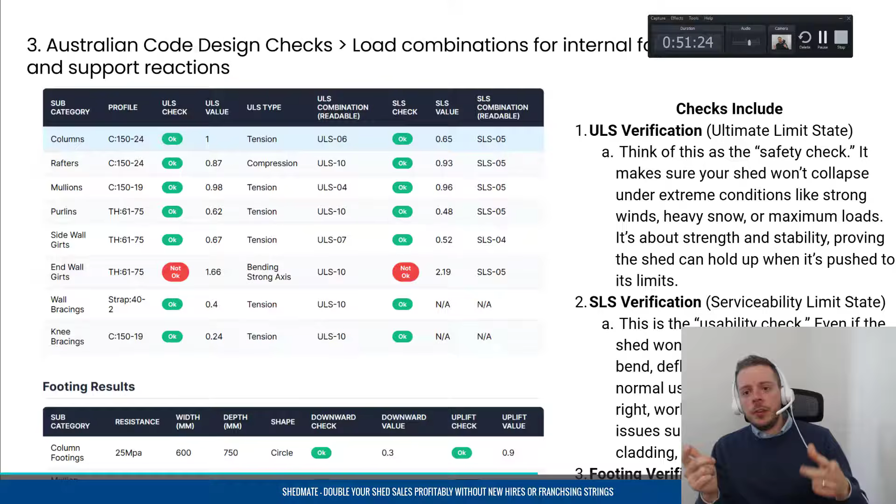So these are the two main checks. And also we do our footing verification to ensure that the footings we design make sense. If they don't, we go back and we do it all over again with the updated frames.

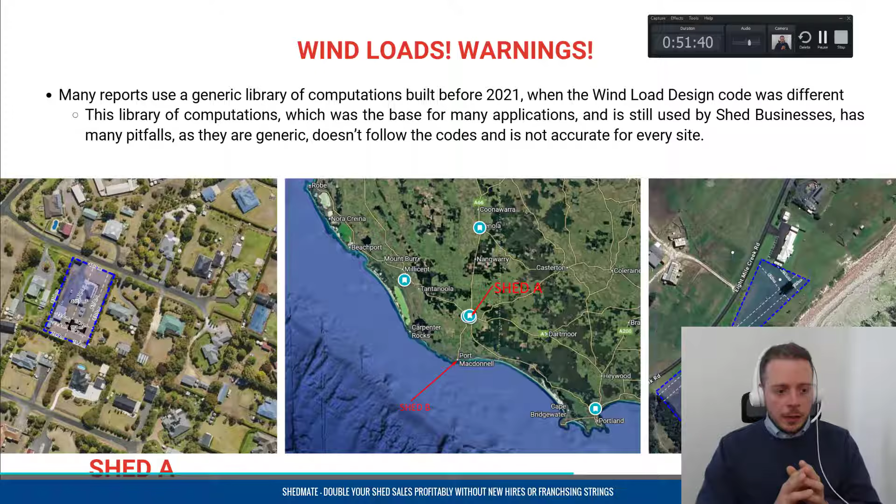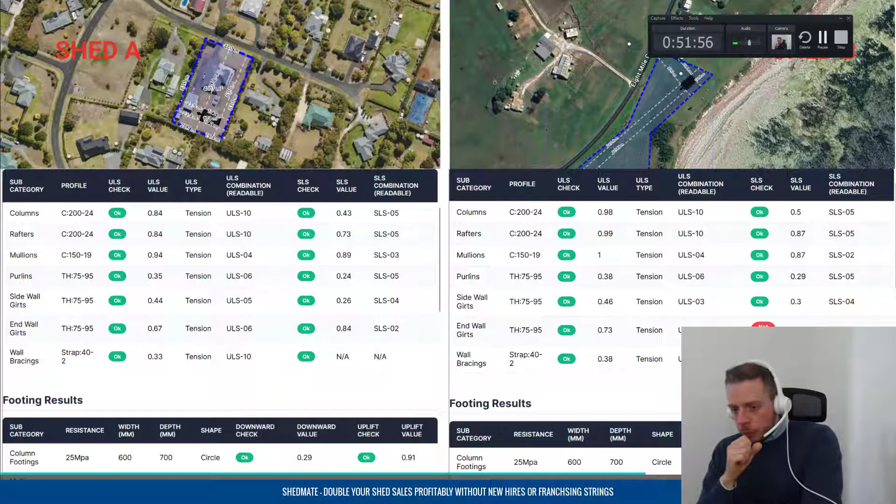Then we did some assessment of two different sheds, one in Mount Gambier, another one in Port MacDonnell here in South Australia. They were using pretty much the same sizing, the same frames, everything is the same. But what changed was the design wind speed. One was 37, the other one was 40. And at the end, the one in front of the ocean didn't pass on the end wall girts, so we would need to change that. So if you're using a generic computation and just applying the same everywhere, this is a very good example that it wouldn't work. Okay.

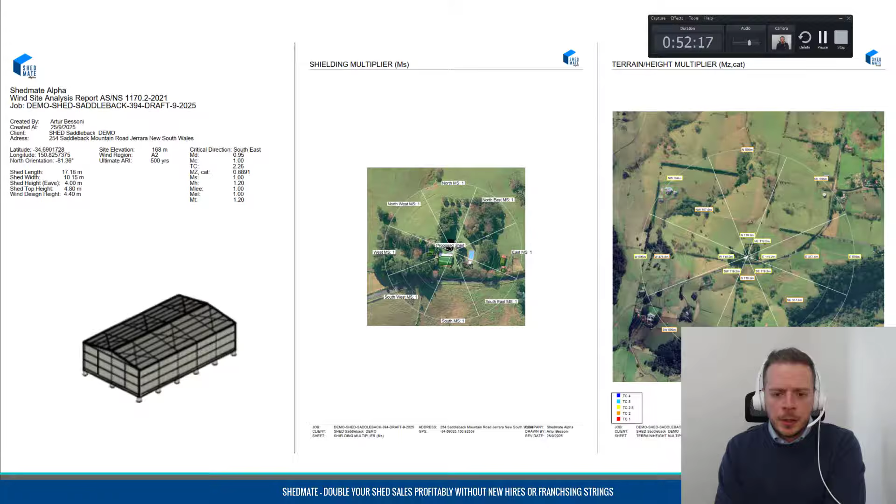Then I presented another example. This one was done in New South Wales, one on the ocean, another one about 300 meters away from the ocean. And once again, the one in front of the ocean didn't pass. So the same applies. You gotta pick any two of the three: cheap, good, and fast. If it's good and fast, it's not gonna be cheap. If it's good and cheap, it's not gonna be fast. If it's cheap and fast, it's not gonna be good.

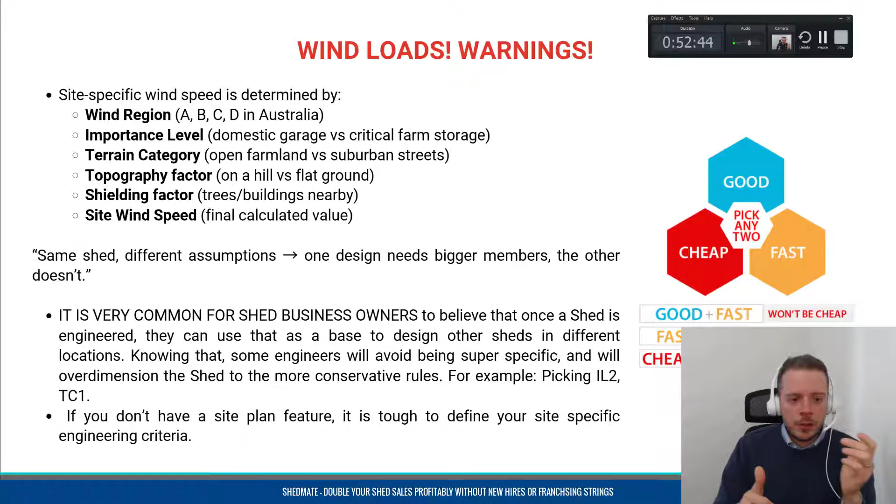And we understood in more detail what impacts the formula to calculate that site wind speed, including wind region, importance level, terrain category, topographic factor, etc. Then I discussed some real world pitfalls. So just be careful about your engineering report. Have a look if it's using site-specific wind or generic wind. Have a look at what grade of steel it's using. Specifically, if you're doing RHS sheds, you might be using something that's different from the engineering report, which can cause some liabilities there. And make sure that the regulations that project was designed to are updated. It's not before 2021, when the wind code was updated.

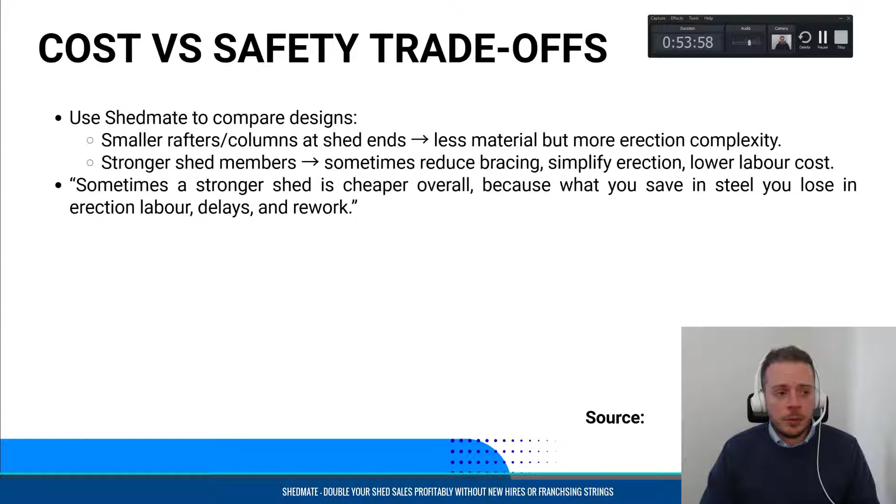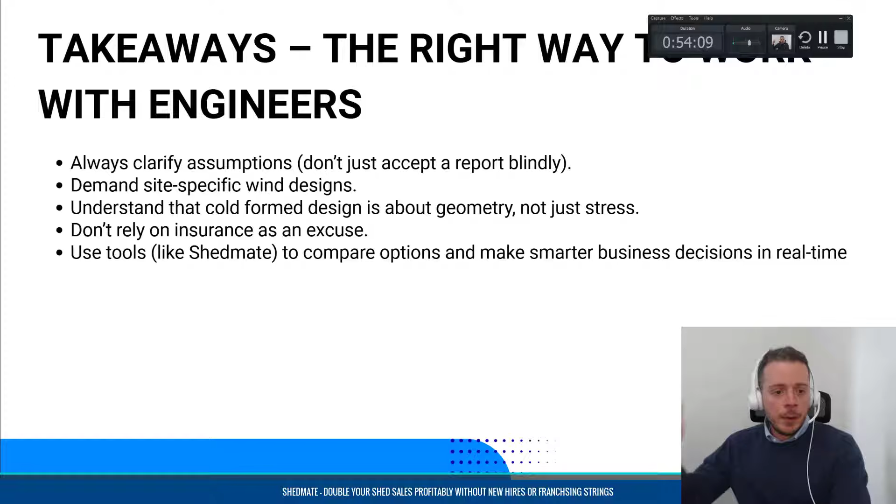So the takeaways from this were: always clarify assumptions, demand site-specific, understand cold formed. This is all about geometry and buckling. It's very important, so you need to understand that. Don't rely on insurance, and use tools like Shedmate to compare that. Engineers aren't trying to be a pain. And I hope that now you have more clarity to question, to align and take control of your projects, talking in a very good language with your engineers so you can understand better what they're doing and get a better outcome from their work.